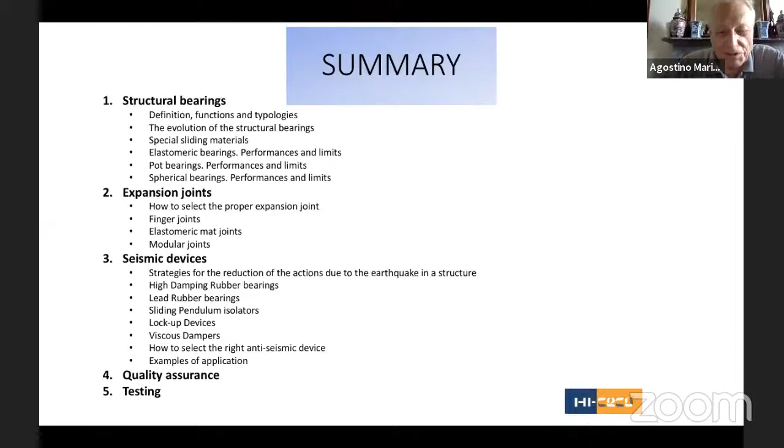So we start with the bearings. I like to make reference to the definition of bearings given in the European standard. What's very important is that bearings are devices allowing rotation. There is no bearing if there is no rotation allowed between the components of the structure.

The bearings transfer forces if they are fixed bearings in all directions, or can allow displacement in one direction or two directions if they are unidirectional or multidirectional bearings. So the two fundamental functions of bearings are rotation and displacement.

There are only 3 physical principles available to perform this function: rolling, elastic deformation, and sliding. There is no other system to accommodate this, to make this function work.

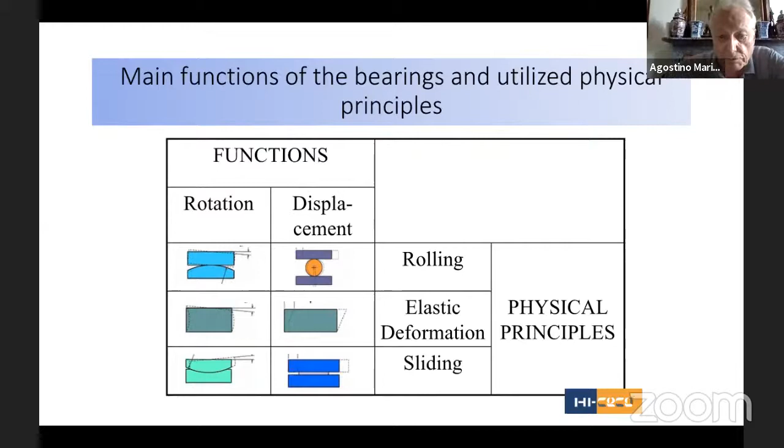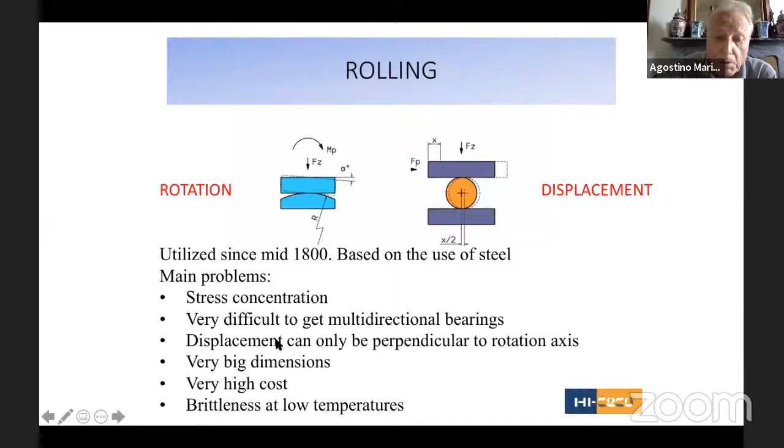Rolling has been the first principle utilized since the mid-1800s, as soon as the industry developed steel products. Rotation and sliding were obtained with a roller, but the roller had important problems: stress concentration, because all loads were concentrated in one line; difficulty getting multidirectional bearings, since rotation and displacement can only be perpendicular; very big dimensions; very high cost; and problems with low temperature brittleness.

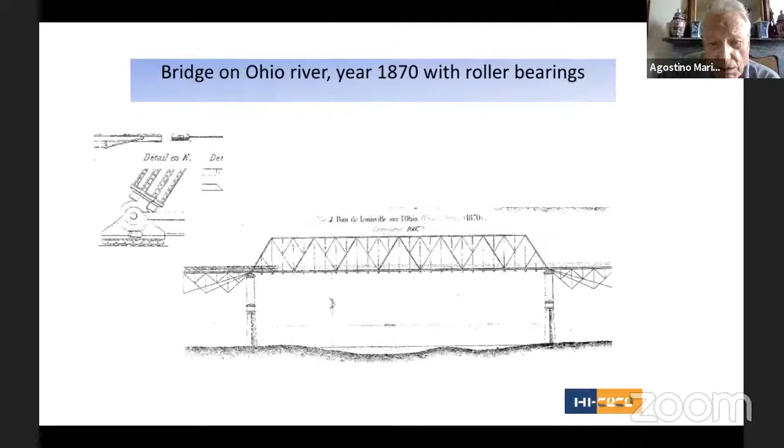We had 0.76 kilogram of steel for every kilonewton of bearing capacity.

The second concept utilized for bearings was elastic deformation. This was used as soon as the process of rubber vulcanization was discovered by an American, Goodyear, in the mid-1800s. Rubber is still used a lot in bearings, for elastomeric bearings and also for pot bearings, with some problems. For elastomeric bearings, you have limited displacement capability and behavior depending on environmental conditions - cold or warm weather influences the stiffness of the rubber, and the rubber has aging problems, so a limited life, not very limited, at least 60 years.

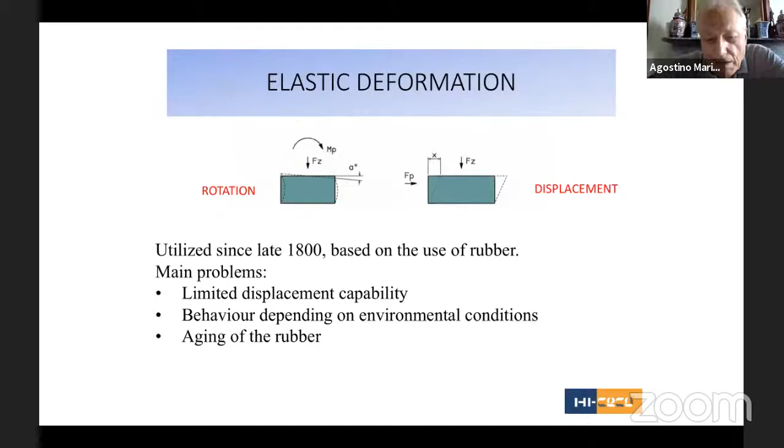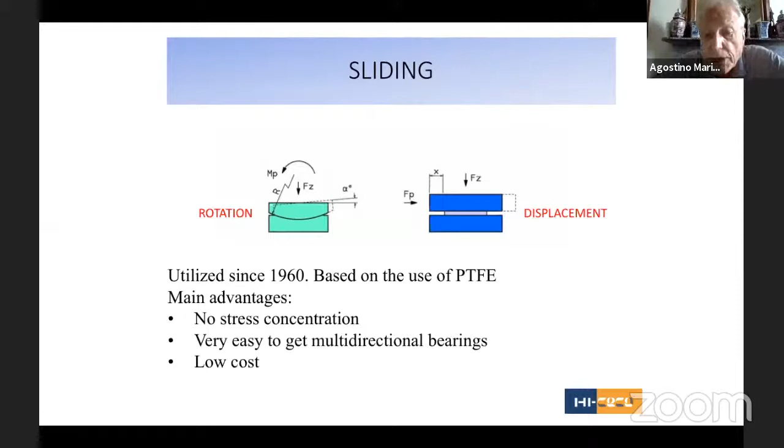The last principle used was sliding. This has been used since 1960, based on the use of PTFE first - PTFE is Teflon, still used. The use of Teflon is due to a German professor, Professor Leonhardt, who was very famous, whom I knew personally. This made a revolution in the field of bearings, allowing bearings with no stress concentration, very easy to get multidirectional bearings, and low cost.

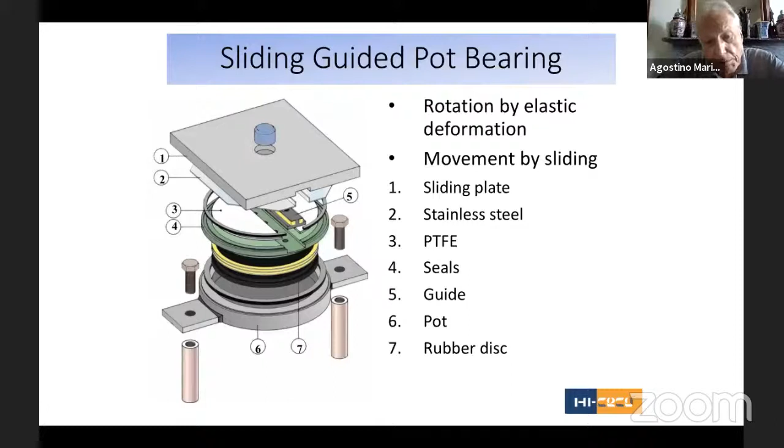Here you have an example of sliding guided pot bearings - I think one of the most used bearings in the world, still used a lot up to now. I won't describe this bearing because everybody knows it, but it's a combination of the deformation capability of the rubber disc and the sliding capacity of the PTFE.

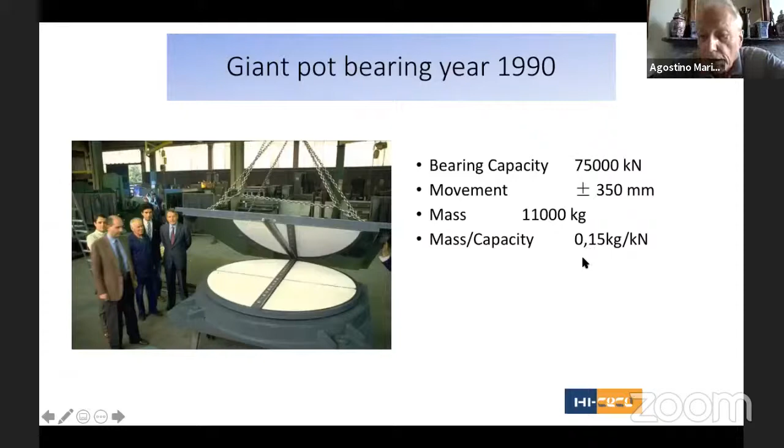Here's an example of giant pot bearings that I designed and we manufactured in 1990 for the football stadium of Milano, with bearing capacity of 75,000 kilonewton. You can see the mass capacity decreased to 0.15 kilogram of steel per kilonewton of bearing capacity.

But the real revolution has been with spherical bearings, and especially with the introduction of new sliding materials, because the PTFE that has been used and is still used has some problems - the size of structures increased always, and PTFE became in some cases insufficient for this.

Limited compressive strength capacity, limited resistance to high temperature, and low wear resistance - wear occurs when the bearing slides, and PTFE can accommodate only 10,000 meters of displacement. This is not sufficient in some railway projects, especially metro lines, where the flexibility of the bridges is high and the displacement due to flexural bending is very high.

These are the limits of PTFE given by the European standard: compressive strength 90 megapascal, but this reduces a lot with high temperature, and wear resistance of 10,000 meters.

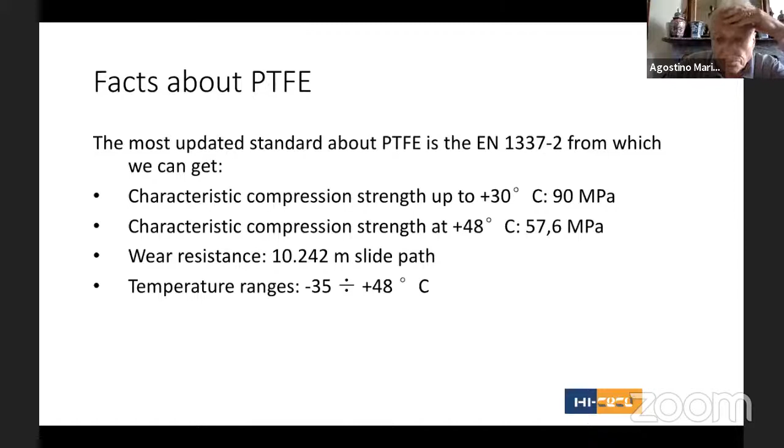The PTFE is no longer good for very long span bridges, special suspension bridges, where the displacement due to wind action is very, very high. Railway bridges and metro lines, due to the frequency of the trains and the flexural bending, induce a lot of displacement. Or when the temperature field is exceeded, which can happen in the Arabic Peninsula and some Indian regions when 48 degrees are exceeded. And this temperature is for sure exceeded when the sliding material is used in anti-seismic bearings.

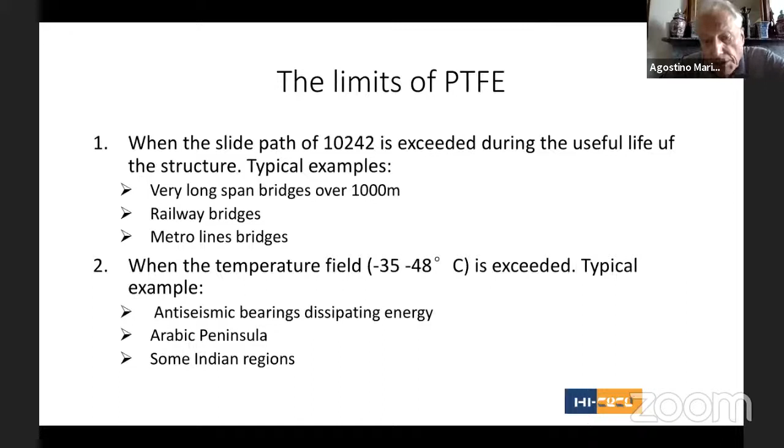So for instance, in a long suspension bridge, this is the Messina bridge that has never been built, designed in all details, but never built. We studied the bearing for this bridge, but the sliding path of the bearings due to wind vibrations exceeded 2,000 meters per year.

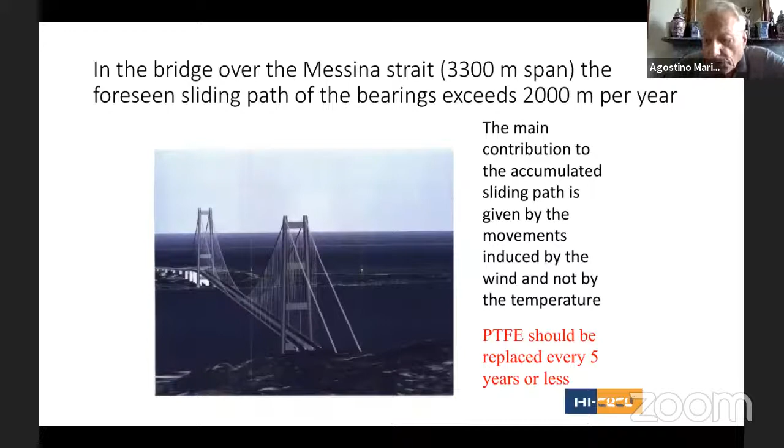So the PTFE absolutely cannot be used. So we developed other materials, for instance for this bridge in Portugal. This just to give you an idea about how the weight of the bridge has been reduced. So the mass divided by the bearing capacity has reduced to 0.05.

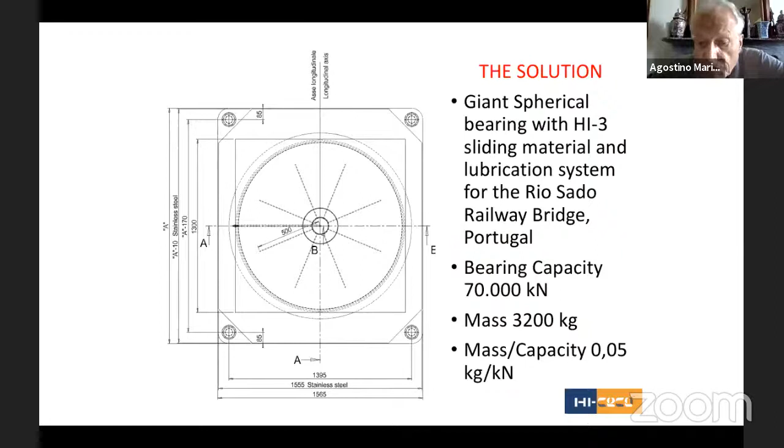The reduction of mass of weight, what we wrongly call weight of steel, reduced a lot, and this reflected in the reduction in cost of the bearings.

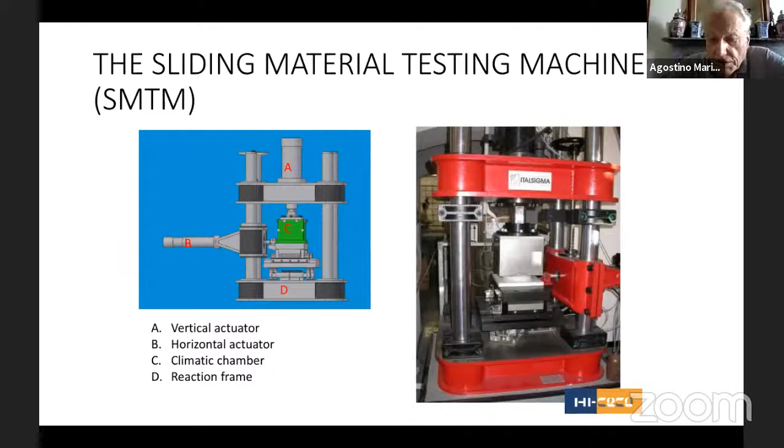So the sliding material, and especially the new generation sliding material, are very important in this field. The sliding materials are tested with a special machine that is represented here.

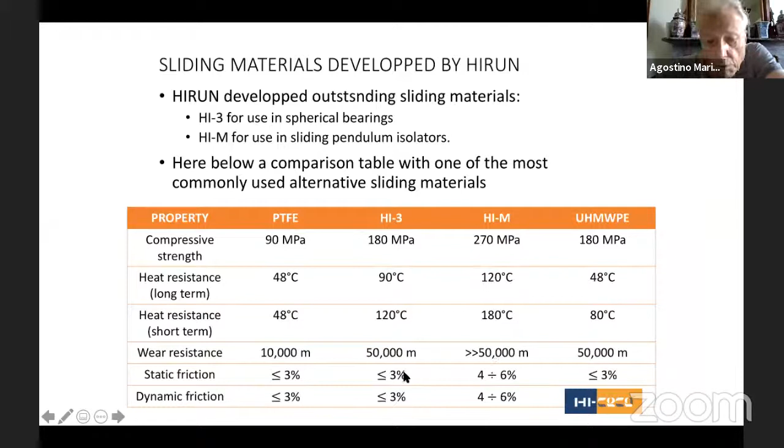I put here in this table the comparison between the main properties of the PTFE and the last generation sliding material. HI3 and HIM are the sliding materials we developed, and ultra high molecular weight polyethylene is another material that is included in some India standards. Maybe now they removed it because it was patented, but just to make a comparison, the compressive strength from the 90 megapascal of PTFE has doubled or more than doubled for the new generation material. The heat resistance is also very much increased. And the wear resistance is amplified by a factor of 5 or more with approximately the same friction coefficient.

So the most suitable bearing to take advantage of the new sliding material, and to take advantage of the reduction in dimension and cost, is the spherical bearing. And for this reason, the spherical bearing is now so widely used in many projects.

Here is an example of fixed bearings. Fixed bearings, meaning they allow 3 degrees of freedom of rotation and transfer 3 forces: the vertical one and the 2 horizontal ones.

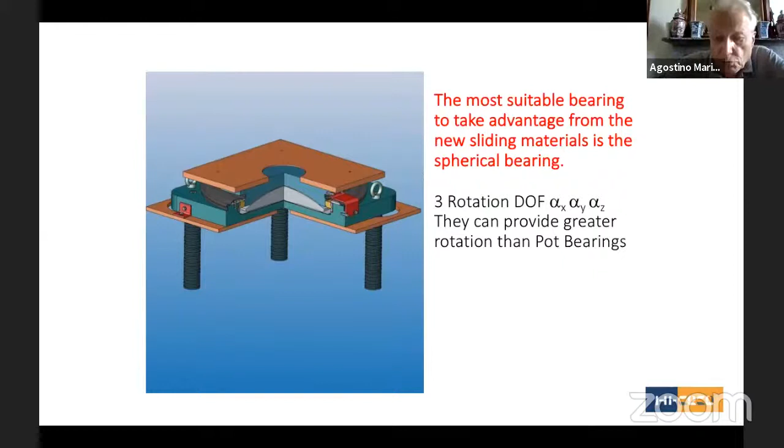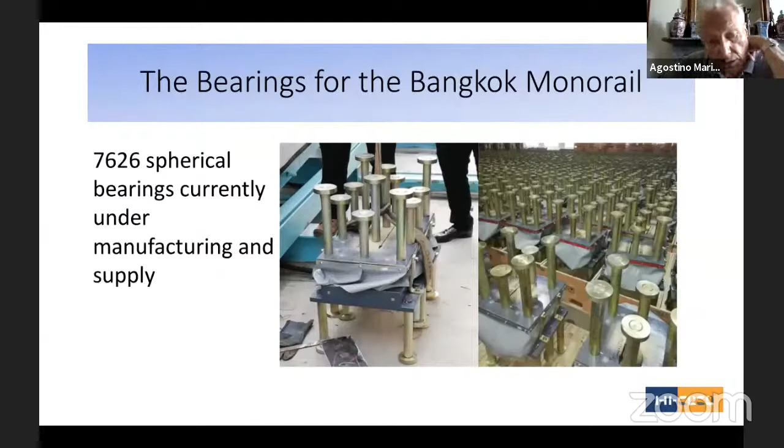One big example of application of spherical bearing is the Bangkok monorail, where nearly 8,000 spherical bearings are currently under manufacturing and supply. The Bangkok monorail is a metro system line, super elevated, and here are some pictures during the construction.

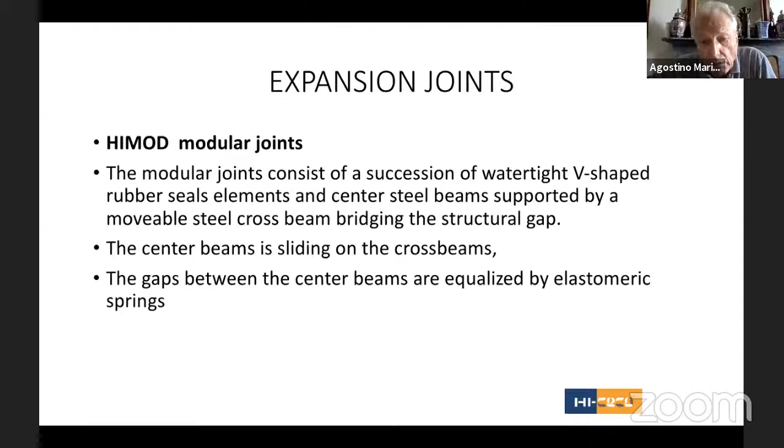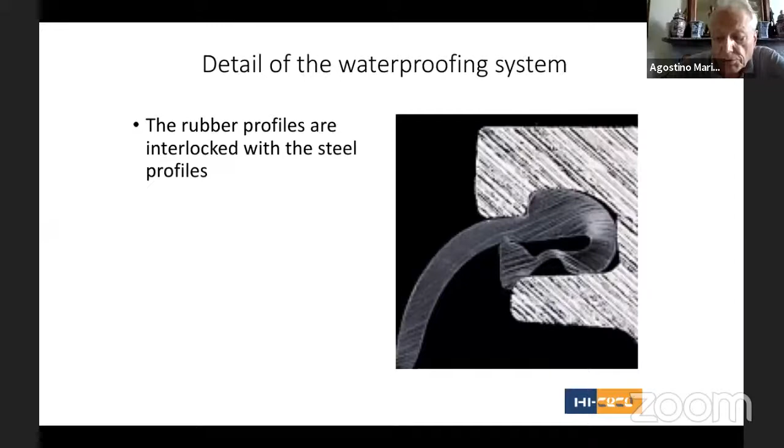Now I give a few words on the expansion joints. There are 3 main types of expansion joints. The modular joints consist of a succession of watertight rubber profiles, rubber seals, and steel beams supported by a cross beam. Here you see the detail of the fixation. Not all types are like this, but more or less all are similar. To get the waterproofing, the rubber profile is inserted by pressure into the steel profile, and the steel profiles are rolled with an appropriate shape to get the connection with the rubber profile.

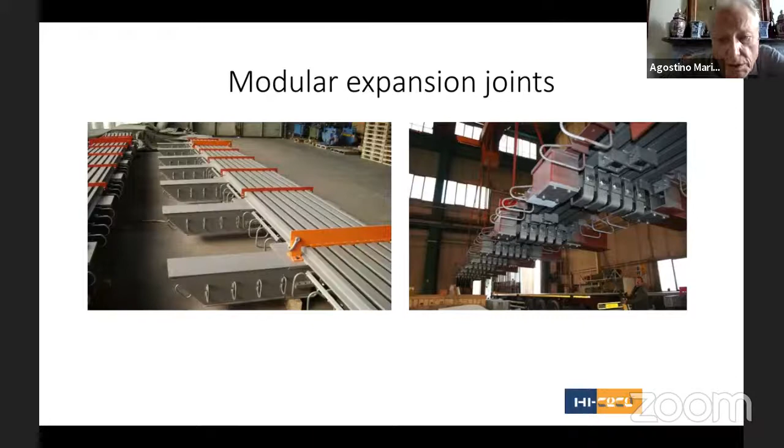Here you see an example of an expansion joint with around 600 millimeter displacement used in an Italian motorway.

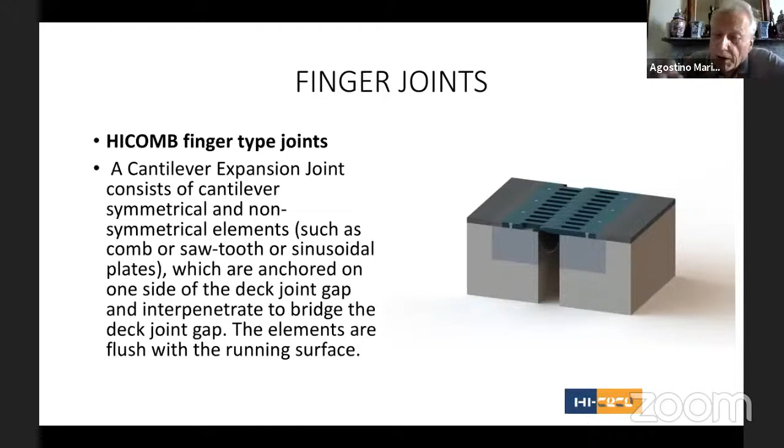And the finger joint. The finger joint was the first joint developed for important bridges since the 19th century. It's very simple and very robust. The only disadvantage is that the waterproofing is not perfect, so it requires drainage underneath.

The rubber mat joint has the advantage of low cost and easy installation. Transversal movement is allowed, so this is very suitable if the bridge is base isolated and can move in both directions. So the rubber mat joint is an easy, low cost and efficient solution.

The disadvantage is the durability is less than 30 years normally, and it is not recommended in cold climates because the rubber becomes very hard under, I don't know, -10 or -20 degrees.

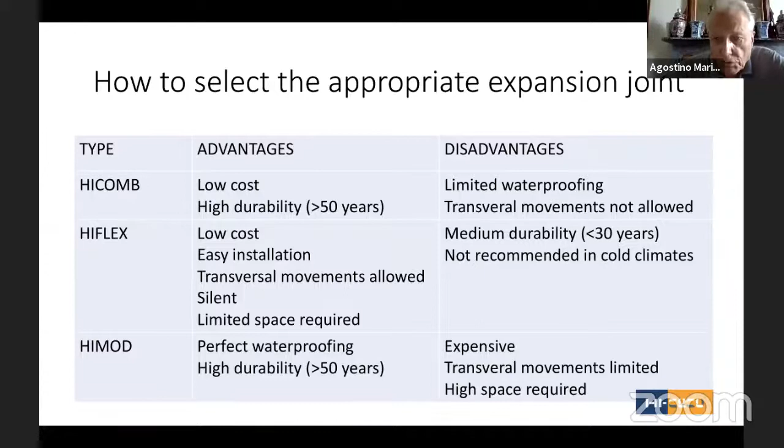So this is all for the joint. I pass to the third topic of the speech, that is base isolation. And I hope to show you that base isolation is an easy technique and can be applied with great advantages to increase the safety of the structure. Normally there is not an extra cost to be paid with base isolation, but a reduction of cost.

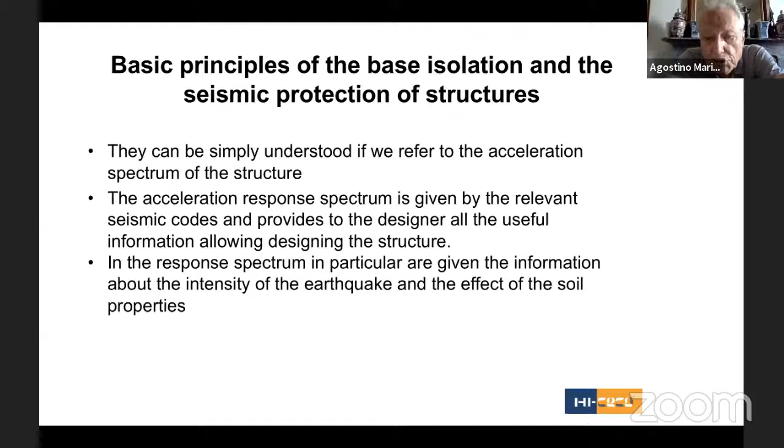So to understand base isolation, we have to refer to the acceleration spectrum of the structure. The acceleration response spectrum is given by the relevant seismic codes and provides the designer all the useful information allowing the design of the structure. In the response spectrum, in particular, is given information about the intensity of the earthquake and the effect of the soil properties.

So here you have the response spectra given by the European standard, but after I will show you the Indian standard, just to see the shape of the response spectra. The response spectra give the acceleration transferred to the structure as a function of the period of the structure.

And this diagram reflects different damping of the structure, from 2%, the highest diagram, to 30%.

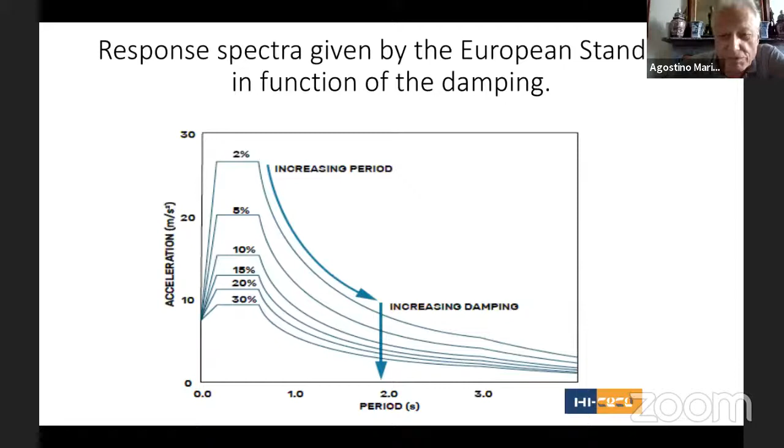Looking at the shape of the response spectra, it is immediately understood what shall be the strategy for reducing the action of the earthquake on the structure: increasing period and increasing damping. So it's very simple, you have to perform these two tasks. Now we see how you can reach these two tasks.

So the anti-seismic strategies are very simple: increase the natural period, increase the damping.

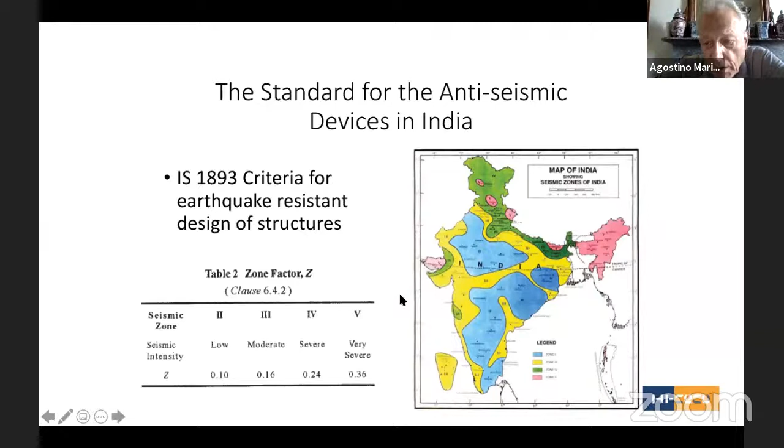Here you see the Indian situation. I took this from IS 1893. I don't know if it is the most updated, but the concept will not vary even if it is. So in India you have seismic zones, 4 different types of zones, and you have the acceleration spectra given for 3 types of soil: rock or hard soil, medium, or soft soil.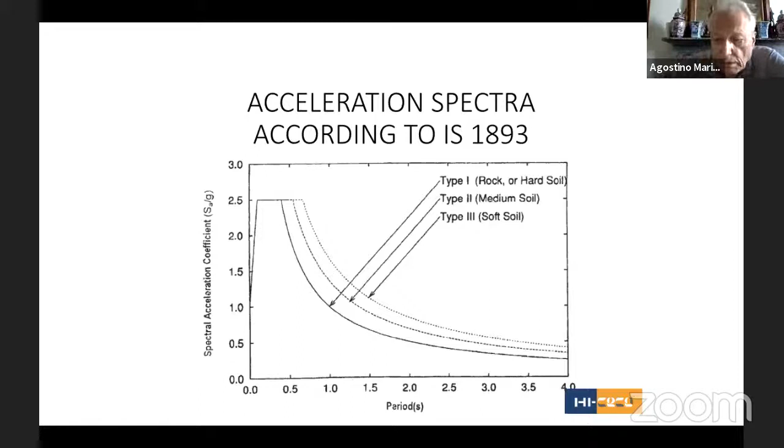And the anti-seismic devices available can be divided into 3 main categories. The base isolators apply both strategies, increasing the period and increasing the damping. The dampers apply only one strategy, increasing the damping. And the dynamic connections do not modify the seismic action; they create supplementary links in case of dynamic actions like earthquake, braking force of trains, or wind.

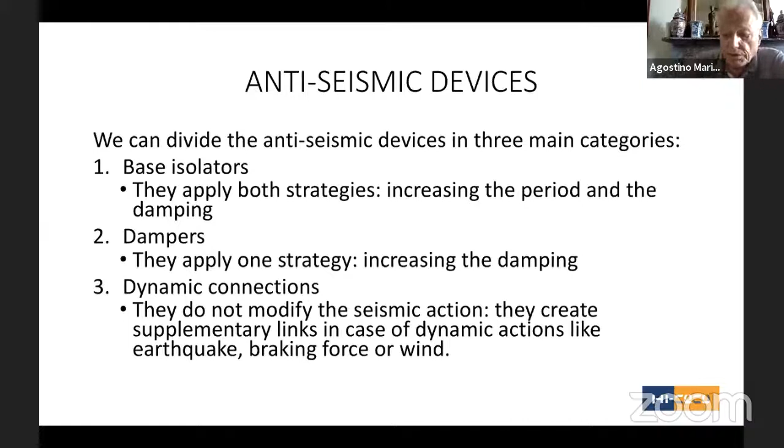So let's see first the base isolators. The base isolators are defined in the European standard as the devices, or combination of devices, providing 4 functions: support the weight of the structure, provide lateral displacement capability, provide recentering capability, and dissipate energy.

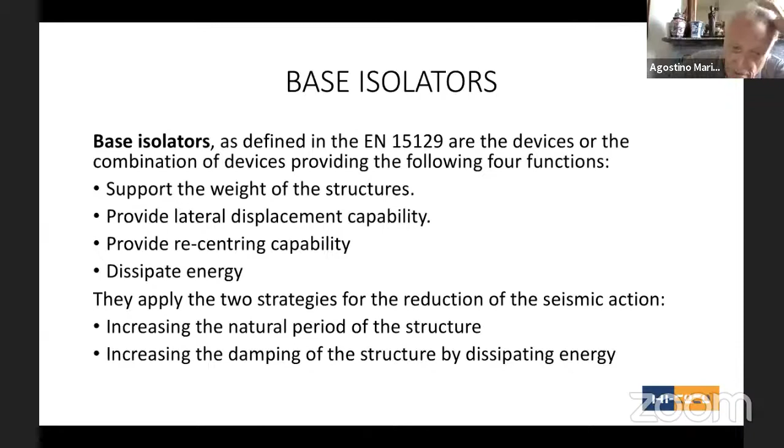So there is no base isolator without recentering capability. This is very important. And there is no base isolation without relative displacement. The base isolator should also dissipate energy to reduce the acceleration, so it will increase the natural period of the structure and increase the damping.

How can an isolator increase the natural period of the structure? The isolator has its own natural period and shall be placed between the structure and the foundation or the piers. Placing the isolator, the structure will be forced to swing according to the natural period of the isolator. So there are two kinds of isolators, and they are harmonic oscillators. One type of isolator realizes the concept of the spring, a system of mass and spring.

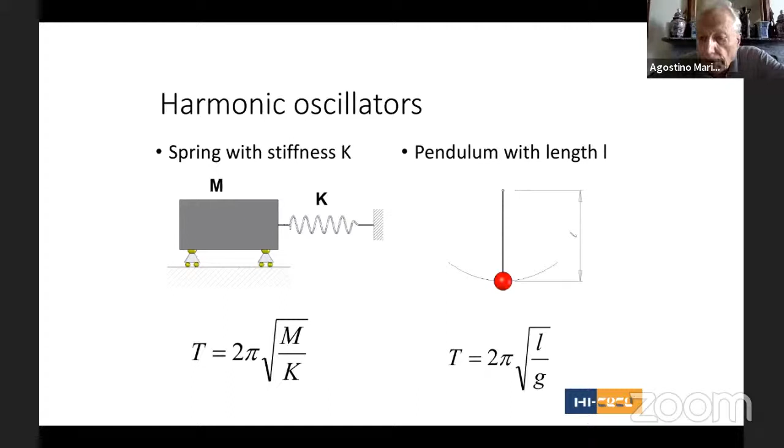And so the period given to the structure is 2π times the square root of the mass divided by the stiffness of the spring. We will see which are the isolators that provide a spring, that are the elastomeric isolators. Or the isolator can be like a pendulum and will shift the period according to the expression 2π square root of L, the length of the pendulum or the radius, divided by g.

The gravity constant. Now we will see the different isolators, how they work, and how the isolator can dissipate energy. There are three systems used: the friction, used in sliding pendulum isolators, the yield of metals in lead rubber bearings, and the viscosity of rubber, used in high damping rubber bearings. Dissipate energy means generate heat, and this aspect is very important and needs special attention and special tests to verify the effect of the heat on the isolators.

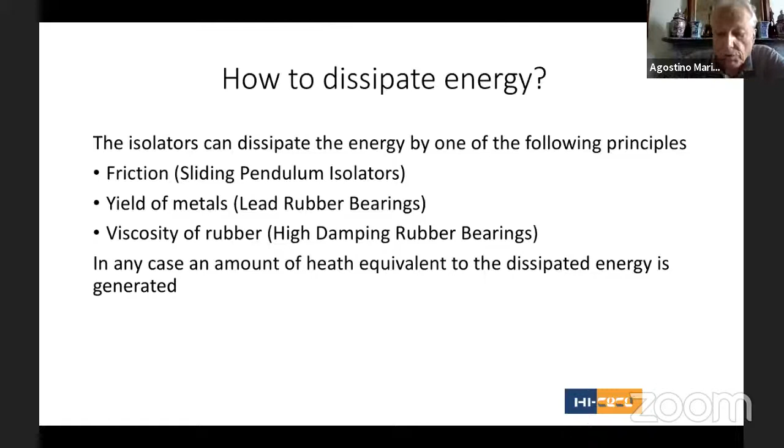So there are three main types of isolator. The high damping rubber bearings, where the spring effect is given by the rubber elasticity, and the energy dissipation is given by the rubber viscosity. This kind of isolator was not the first isolator invented, it was invented in year 1985 by Professor Jim Kelly of the University of Berkeley in California.

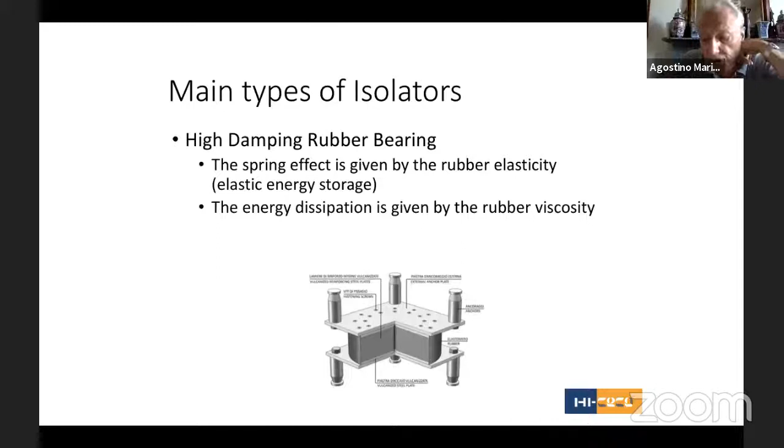The stiffness, you cannot define it simply. By convention, the stiffness is the stiffness of the third cycle for rubber elements, because the rubber has special properties. The first cycle, for instance, gives a higher stiffness and has a phenomenon called scragging. But for this reason, we take conventionally the third cycle to define the stiffness. So the behavior of the high damping rubber bearing can be completely defined by two parameters only: the stiffness and the equivalent viscous damping.

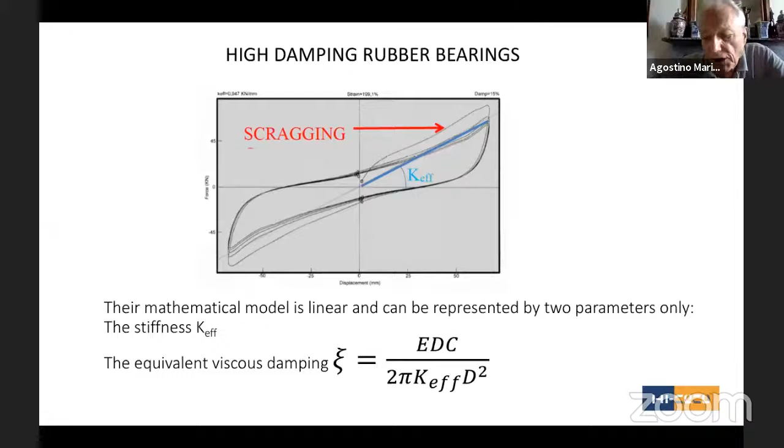The second type of isolator is the lead rubber bearings. This was the first one invented, in year 1974, by Professor Robinson from New Zealand. So the spring effect is given by the rubber elasticity again, and the energy dissipation is given by the yield of the lead core. I can say this has been the most used and is still the most used base isolator in the world, used for buildings, for bridges, for any kind of construction.

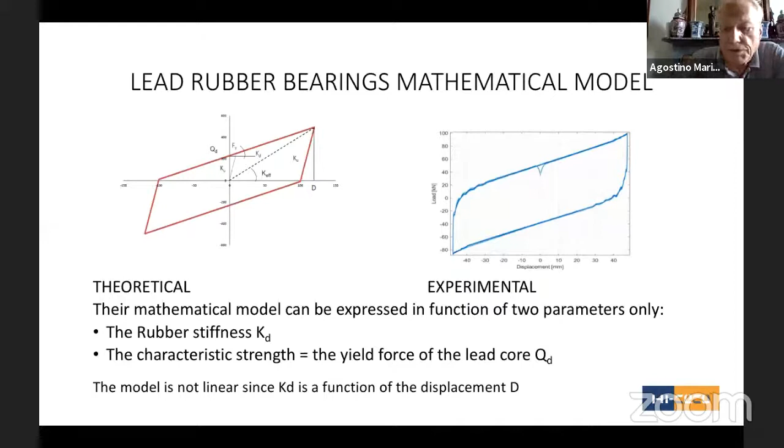The third kind of isolator is the sliding pendulum. The sliding pendulum can move according to the surface of a sphere with a certain radius. So it's supporting the weight of the structure and providing lateral flexibility. Why? Because when it moves, the whole structure is uplifted, storing potential energy that is given back as it returns to the initial position. The energy dissipation is provided by the friction of the sliding material.

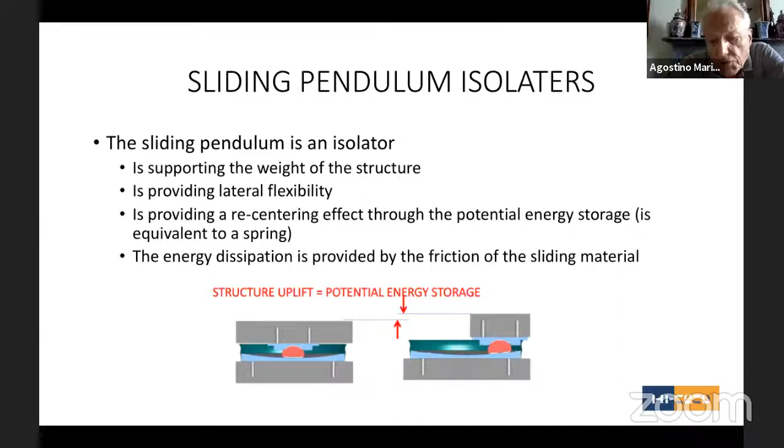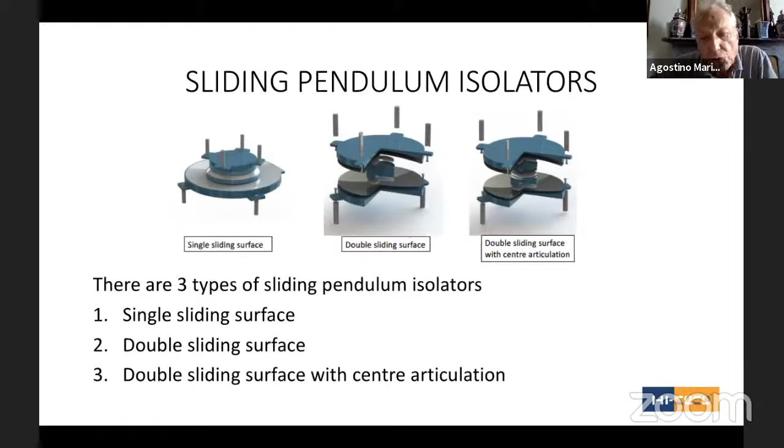So, the sliding pendulum is, I think, the most efficient isolator now. It's not very much used because maybe the designers are still reluctant, they don't know how to use it. However, it's very simple. There are three kinds of sliding pendulum: with one sliding surface, with two sliding surfaces, and with two sliding surfaces and a center articulation. But from the kinematic point of view, they are all perfectly equivalent, and their behavior can be fully described by two parameters only: the equivalent radius and the dynamic friction.

And together with the displacement and the weight, we can define the stiffness, the period, and the damping of the structure. So now, I don't have time to show how to use every kind of isolator, but I will just show, for the sliding pendulum, how to select the right pendulum.

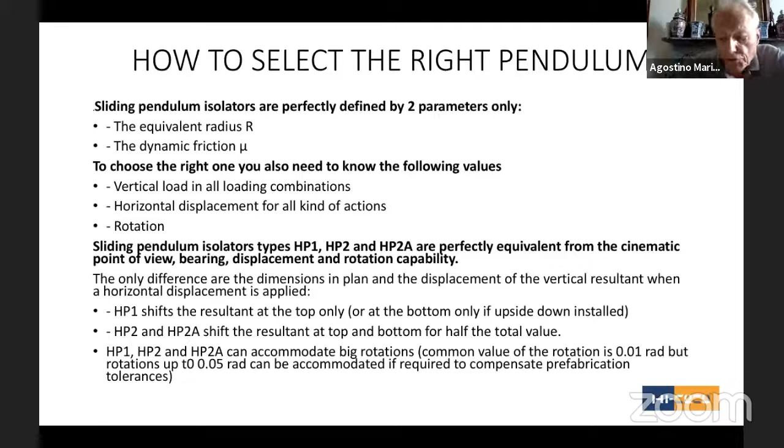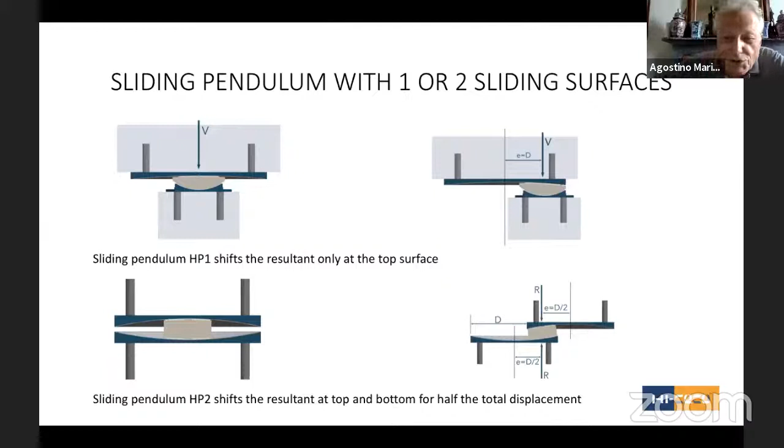The function of the pendulum is defined by the radius, the dynamic friction, and we need to know the vertical load, the horizontal displacement, and the rotation. First of all, we select the pendulum with one or two sliding surfaces. We see that the pendulum with one sliding surface is shifting the resultant only at the top, and the sliding pendulum with two sliding surfaces is shifting it by half the value. So normally, for bridges, we use the pendulum with one sliding surface, and for buildings, to limit the eccentricity in the columns, we need the second type. But this is not a mandatory rule, we can use it as we want.

So what are the advantages of the pendulum in comparison with the rubber isolators? In the rubber isolator, the period is a function of the mass and the stiffness, and both of them can vary. Instead, with the pendulum, the period depends only on the radius and the gravity constant, which cannot vary.

For the rubber isolator, the stiffness is an intrinsic property of the rubber, combined with its geometry. So, especially in buildings, the center of stiffness may not coincide with the center of mass. With bridges, this is normally not a problem. For the pendulum, the stiffness is proportional to the mass, so the center of stiffness and mass are always coincident.

But what is most important? With the rubber isolator, the period shift has a limit given by buckling, because to increase the period you must reduce the stiffness. But you cannot reduce the stiffness too much, otherwise the isolator will not support the vertical load. So practically, you cannot increase the period beyond 3.5 seconds. Instead, for the pendulum, you have no such limitation. To increase the period you just increase the radius, and the only limit is the recentering capability. So practically, you can increase the period up to 6 seconds.

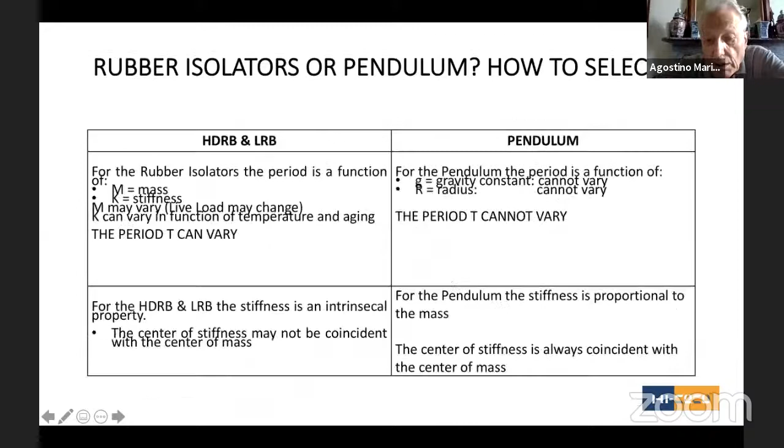However, it must be said that the pendulum is not suitable if the period must be low. This can be the case when you want to reduce displacement, for instance in nuclear power plants or metro lines where the rails are continuous and you don't want too much displacement in the beams. The pendulum also has a higher service life, is independent from environmental conditions like cold or heat, and is fire resistant.

Normally, you perform the seismic analysis of the structure with software like SAP 2000 or ETABS, and that is very fine. But I always suggest performing a preliminary computation with a simplified analysis. This allows you to select the right isolator in a very easy way.

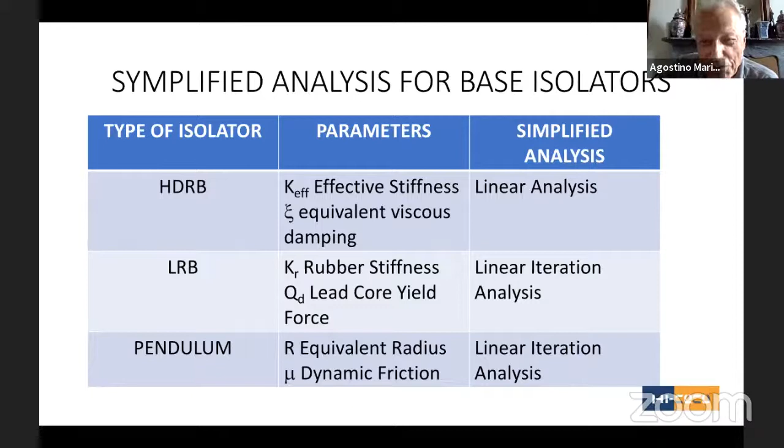So with high damping rubber bearings, you can perform the linear analysis. And with lead rubber bearings or pendulums, the linear iteration analysis. That is very easy. I will show now how it is performed for the pendulum. But if you want to go deeper into this, you must write me and I will help you. So to do the linear iteration analysis for a pendulum, we need to know the weight supported by the isolator.

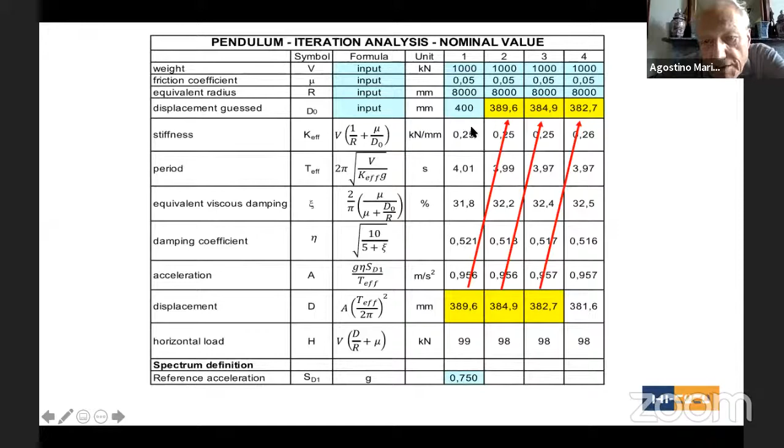After that, you can get the period with an easy computation. The period equals this value divided by the acceleration; the acceleration equals this value divided by the period. It's a hyperbolic function. So you input in your Excel cells the mathematical definition of the stiffness, the period, and the equivalent viscous damping with this formula.

The damping coefficient, here I used the reduction of acceleration given by the European standard, but in the Indian code you have a slightly different formula that you can input. And after that, you get the acceleration and the displacement, and here you verify if your input displacement equals the output. If the output equals the input, you are okay.

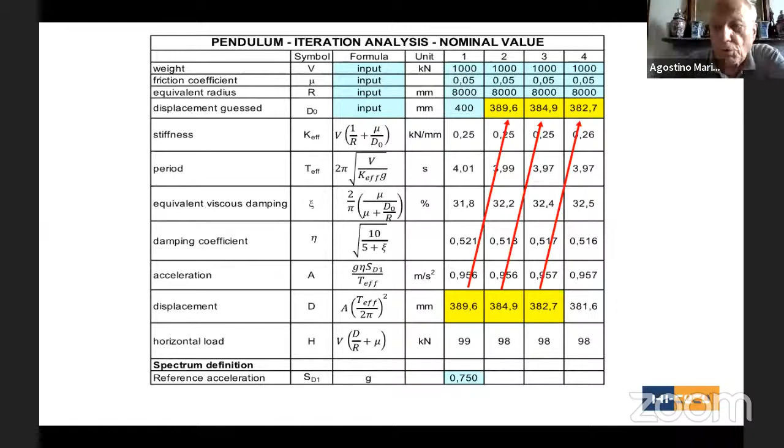But in this abacus, you iterate: you put the displacement from the first step of computation as the input of the second, and so on, until the output is equal or nearly equal to the input. At that point, you have defined your isolator. At this point, you can make your design and verify it using ETABS or SAP 2000. So I always recommend this initial approach with the simplified analysis.

Now a few words about the hydraulic devices.

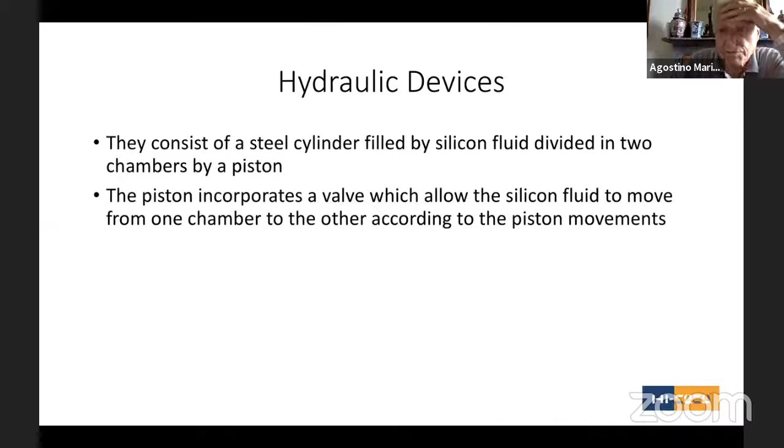All the hydraulic devices consist of a steel cylinder filled with silicon fluid, divided into two chambers by a piston. The piston incorporates valves, allowing the silicon fluid to go from one chamber to the other according to the movement. So this is the scheme of a hydraulic device, and what is in pink color is the oil. The hydraulic device has spherical hinges at both ends, connecting two parts of the structure.

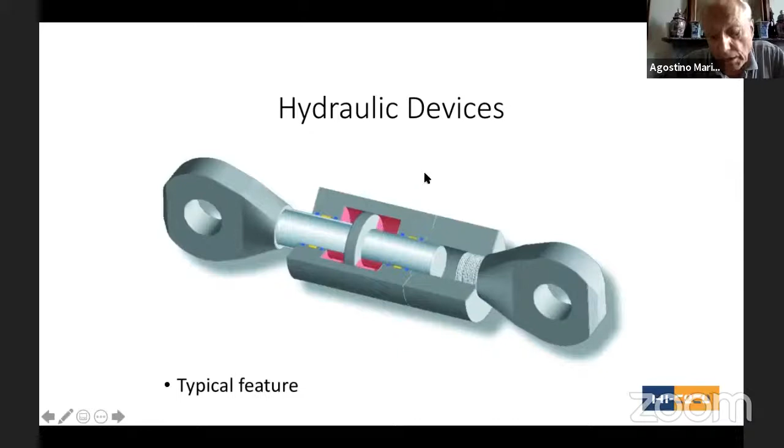When the structure moves due to the earthquake, the oil must flow from one part to the other. The mathematical model of the hydraulic devices is shown by this formula, a very simple one: the force is equal to a constant multiplied by the velocity at an exponent alpha. With the valve, we can modify the exponent, and normally the exponent used in construction of anti-seismic devices varies between 2 and 0.

Here is the diagram of the force as a function of velocity. With exponent 2, we have a parabolic diagram. Exponent 2 is what gives automatically a device without valves, where the oil flows through a hole. This is the law of turbulent movement, according to so-called Reynolds - this is parabolic. We see that this behavior dissipates a lower amount of energy.

So to have what we call the viscous damper, we want to modify the exponent and bring it near to 0. In green you have exponent 0.01, and in red, exponent 0.15. Normally we use these exponents for the viscous damper, and we use exponent 2 for lockup devices. The difference in behavior is: lockup devices just create a supplementary connection of the structure, while viscous dampers dissipate a lot of energy.

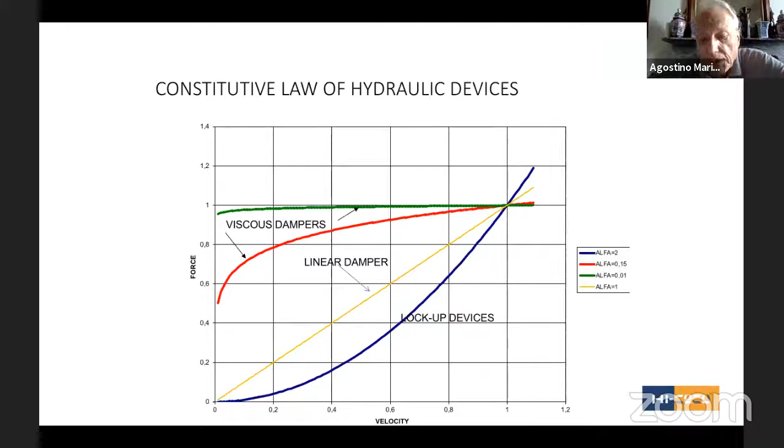You see the difference in energy dissipated here in this diagram, where for the same devices we have the diagram of the force, not as a function of velocity, but as a function of displacement under a certain movement law. In red, we have the result for exponent equal 2, the lockup devices. In black, we have the viscous damper device, which dissipates more energy.

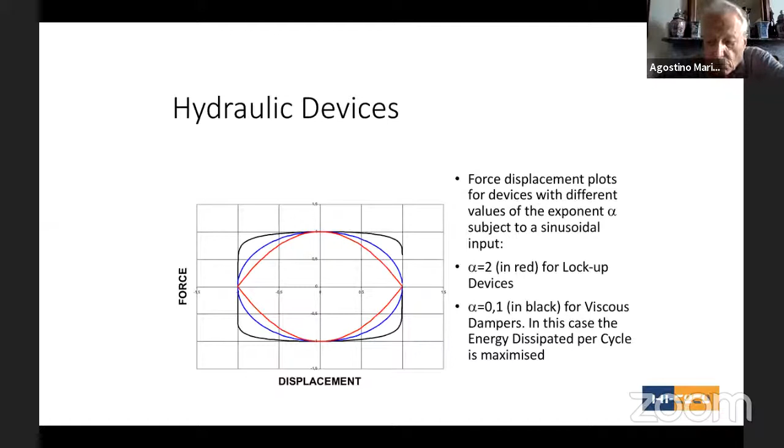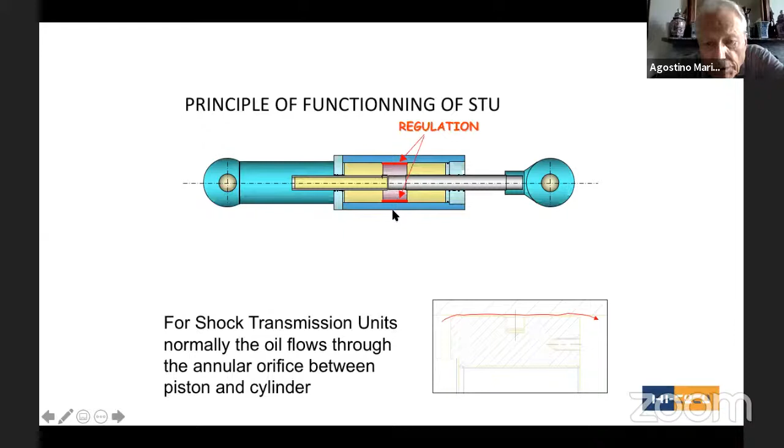So physically, okay, I already explained this. Physically, the most simple shock transmission unit has oil flowing through the space between the piston and the cylinder. For the viscous damper, this is more complex - for this reason, they cost more money. The oil must flow through valves inside the piston.

The computation of the structure incorporating these kinds of devices is not as simple as for the base isolators, and requires time history analysis.

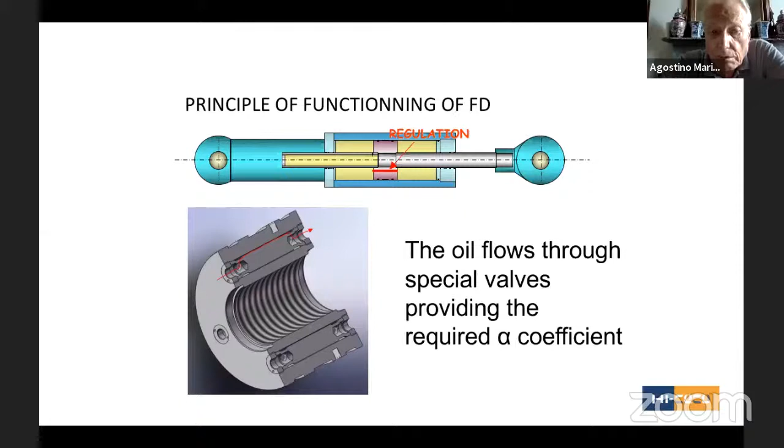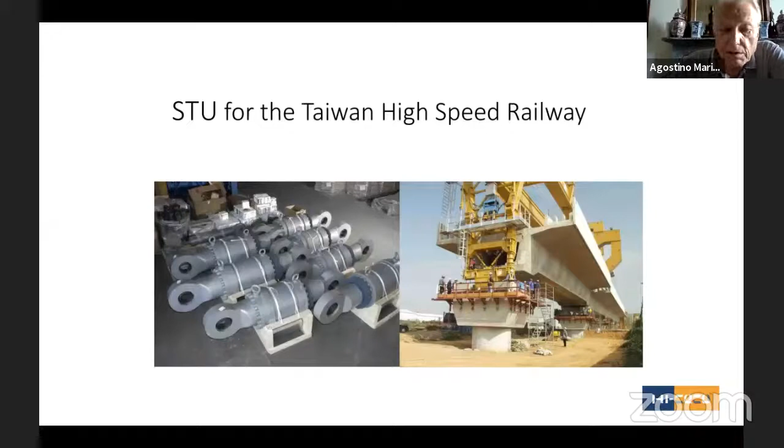We supplied for the Taiwan high-speed railways. This was for an application not for earthquake, but for a common problem on railway lines: normally beams for high-speed rail are simply supported, but in the station there are continuous beams for some reason. The problem is when the train brakes, the designer doesn't want all the horizontal load to go on one pier.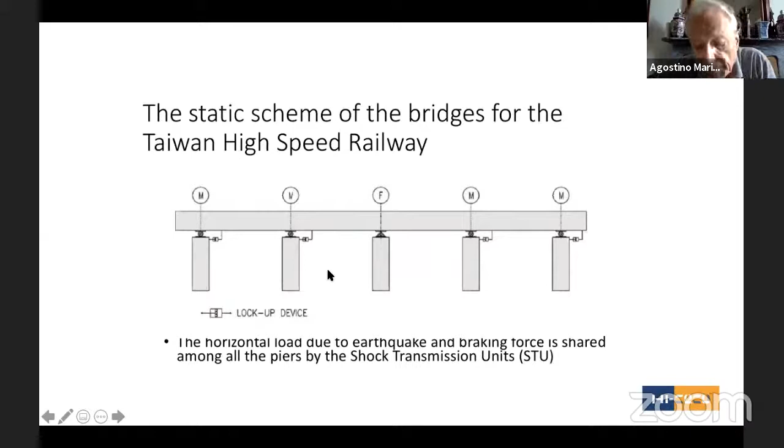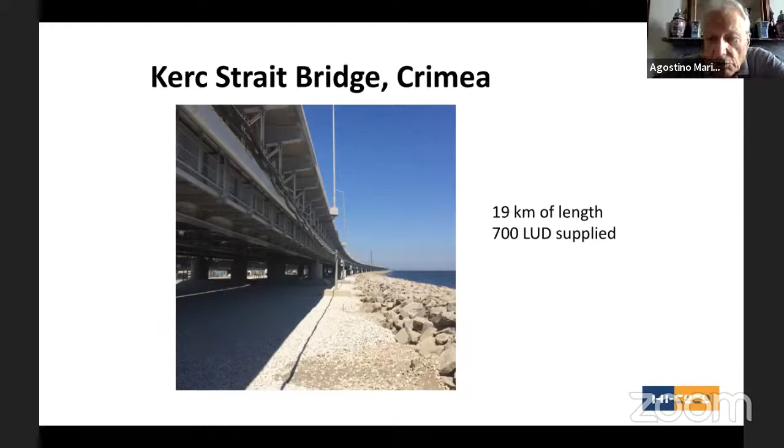So the lockup device is used to share the horizontal load between many piers, between the fixed and movable bearings as well. Here are some examples of application in Portugal, in Romania. The most important application we recently did was the Kerch Strait Bridge connecting the Crimea peninsula to Russia, where we supplied more than 700 devices.

Dr. Marioni, may I ask you how much time - is about 2-3 minutes fine to find out? Maybe 5 minutes, I try to, because we want to give more time to the audience to clarify their minds - a few words on quality assurance and testing. Maybe 5 minutes. Sure.

So in India we work with HI-CECO, and all the products for India are manufactured in India. We have ISO certification, of course, and all the certificates. For many products, even if not required in India everywhere, we have CE marking, which represents a higher level of quality assurance.

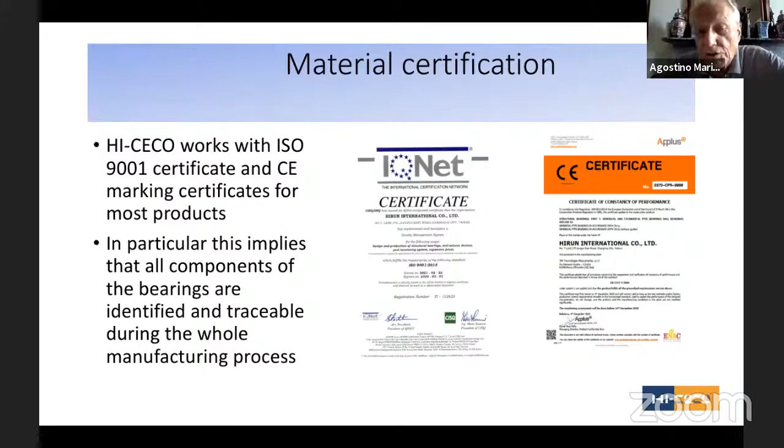This is an example of the material certification. All raw materials are tested according to the quality control plan.

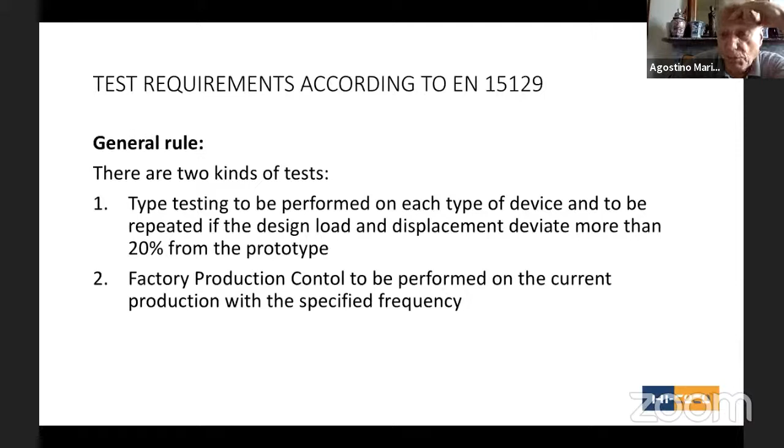According to the European standard, there are two kinds of tests - but now I think India is implementing their own standard for anti-seismic devices, getting inspiration from the European standard. We have type testing, to be performed on each type of device, and factory production control.

So here in this table - this presentation, I sent the PDF to Mr. Vinay Gupta, so it can be shared with all the participants, can be given if you lose something because I go very fast.

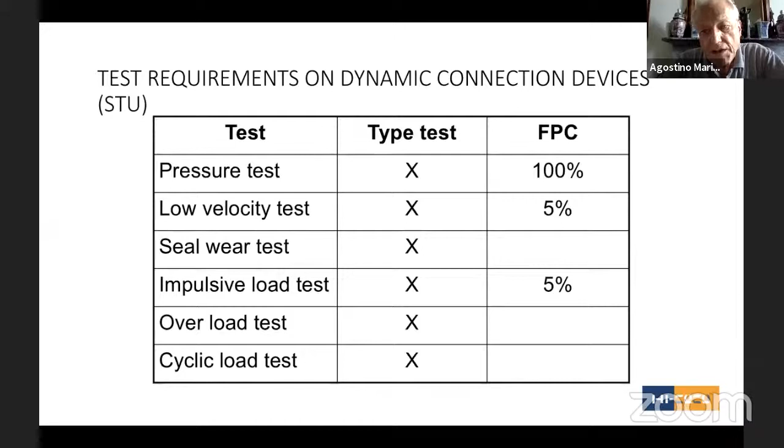Here are the different tests required by the European standard, divided into type tests. The type tests normally are more complete, while the factory production control only covers some aspects. For instance, for hydraulic devices, the factory production control is required only for 5% of the pieces, and also for the viscous damper. For the rubber devices, factory production control is required for 20% of the pieces. This is different from the American standard, which requires 100% of pieces to be tested.